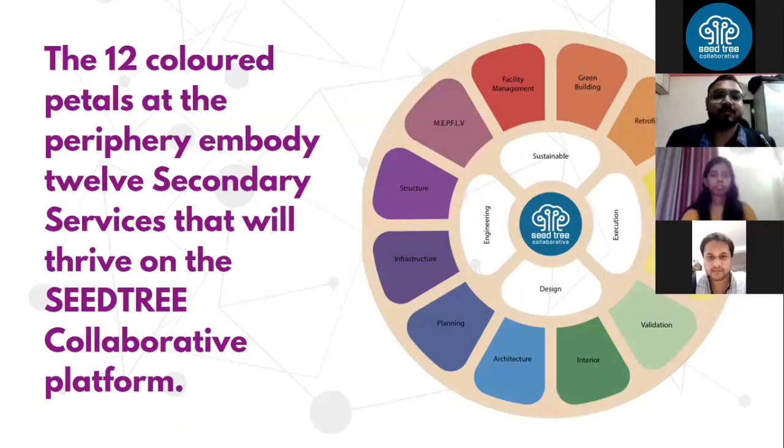So right now, till this particular stage, we have 2,863 professionals from 15 countries, 42 states, and 448 cities. So yes, thanks to each and every professional's contribution towards our company, we have come to this particular platform where we can say, yes, we are doing a good job. And we can hope that we can do much, much better in the future.

Now, to begin with this, I would like to say a little about our CEO and founder, Mr. Architect Karan Athodaria. History has seen many great leaders, and today we see them in Karan Athodaria.

Even during his career of 9 years in the field of architecture, he has identified various gaps in the AEC industry. The utter neglect towards the competence of industry professionals during the COVID-19 pandemic gave him the best idea that any man could have, and he revolutionized this particular AEC platform to a greater level.

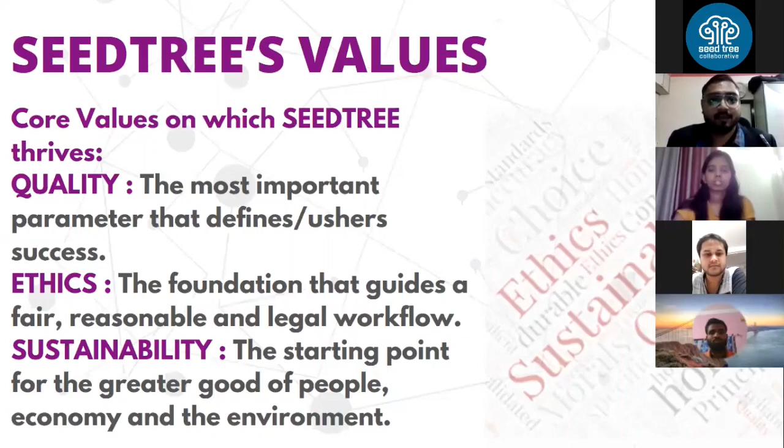Now, this can happen only with your contribution, our professionals' contribution coming to our platform. Our mission is simple: we bring every AEC professional to our particular platform. We give them a live stream of clients, and to our clients, we can provide the best slot of our AEC professionals. That is what we're looking at. That is what our mission is.

As I said earlier, imagine if in one city there are 100 AEC professionals, and now imagine if all the professionals are on one particular platform. You must be imagining there are 100 AEC professionals. We bring them all together.

How can we grow? For you, we have a new thing that we want to introduce, and that is our community platform. As you know, in recent times we have started our Facebook group, on which we have started to promote one particular idea which is beneficial for you, that we want you guys to collaborate with each other.

Our community platform encourages all AEC professionals to come together and interact with each other. Since we are on a digital platform, even if you are sitting in Mumbai and the other professional is in Surat, you can still come together digitally and work on that particular project. That is the main idea that we're looking for.

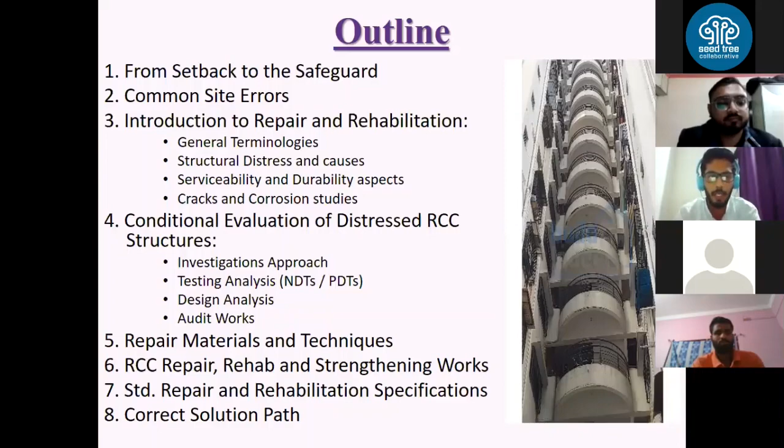The outline of topics we will be covering, you can see on your screens: from setback to the safeguard, followed by common site errors, introduction to repair and rehab. It will include general terminologies regarding repair and rehabilitation of RCC structures. Apart from that, conditional evaluation, which is the most important topic of the entire webinar, followed by materials we will be using for repair and rehab, then the specifications, what all procedures we need to follow for any structural repair work, and lastly the correct solution path. We'll see all of them one by one.

Okay, so we'll start with from the setback to the safeguard. As you have seen the topic, evaluation of RCC structural distresses, it has been highlighted in brackets from the setback to the safeguard. I have intentionally mentioned this to get the attention of all the professionals here. The setback to the safeguard is a very important thing to note.

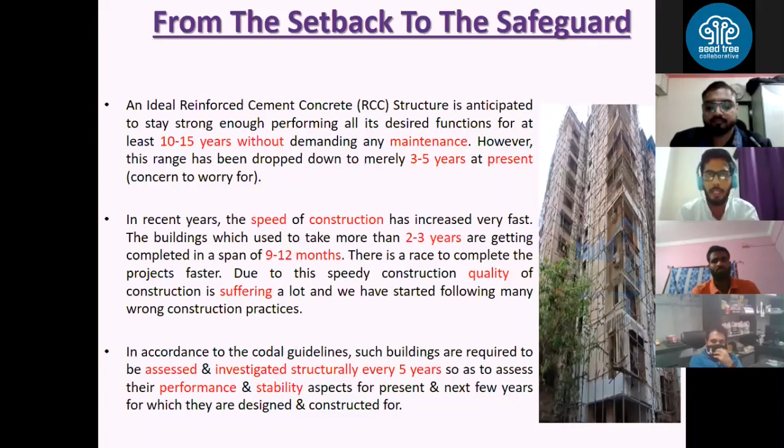Setback means, if we talk about a few years back, the RCC structures which were being constructed, the quality of construction and the quality of materials available in those days is not available in today's scenario. So this setback was all set perfectly fine. But if we talk about the safeguard, yes, the buildings are not that safe. So you can see accordingly.

Now the problem is these three phases are not good for your construction and casting provision. But what is the actual use of starters? If I ask you what is the actual purpose of constructing a starter before casting any column, it is proper positioning of the column. Now my question is, is proper positioning the only thing we are looking for? Or does the starter make sure that your column is constructed in a single pillar, in a single alignment? The answer will be no, right?

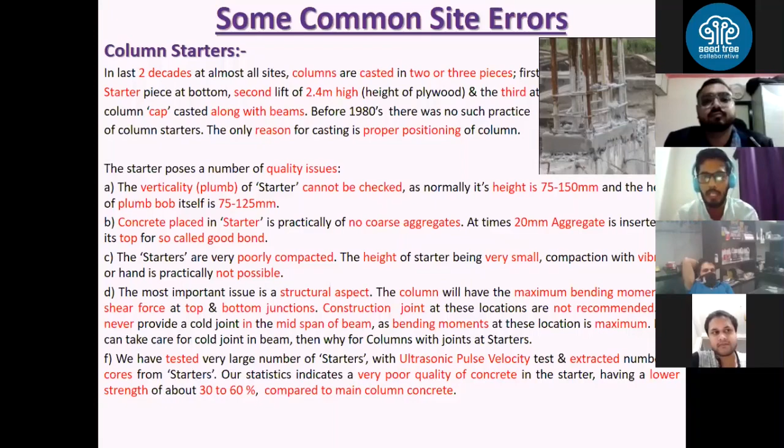Similarly, for the starters, when we are making the concrete material, what about the volume of coarse aggregates which we are using? And if we are using the coarse aggregates, are they of the desired sizes which should be used? Are they of 20 mm sizes, right? So all these things we need to look after.

Now, if I talk about column concreting, the casting of columns, again, as I said, is done in 3 phases: starter, plywood level, and then the top level. As per the IS codal provision, we are aware that we need to pour the concrete from less than 1.5 meters height. But in current practice, it is more than that, right? So this leads to the segregation problem and all those sorts of things.

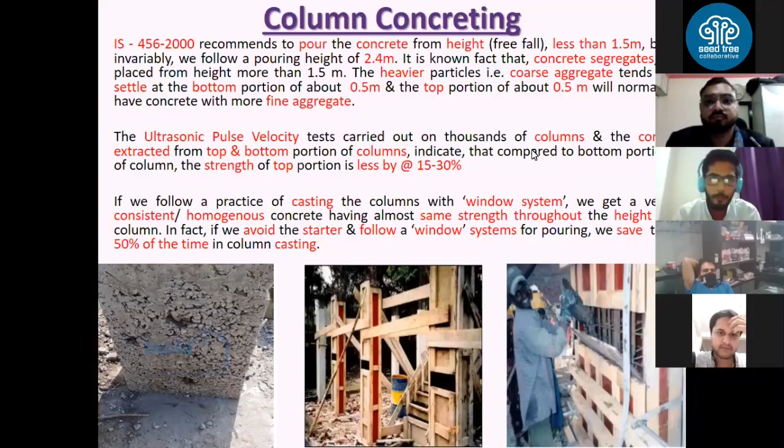Okay, now one more important problem is regarding the waterproofing and the plaster work. It is a very common practice that when the structural designer is designing a particular terrace or floor slab, the load he is assuming for the design purpose is around 200 to 250 kg per square meter as an assumed dead load. But what about the practicality of this? If you have a large span slab, then the load is much more as compared to the one which was taken earlier, right?

So there are many factors which are influencing this, like the distance between the drain spouts, and all those things are visible only on site. They are not considered in the design part. So these are also some of the problems. Along with that, plaster issues. Plaster is all about the thickness of plaster, whether it is the inner wall or the external wall. The same thing happens with plaster work also.

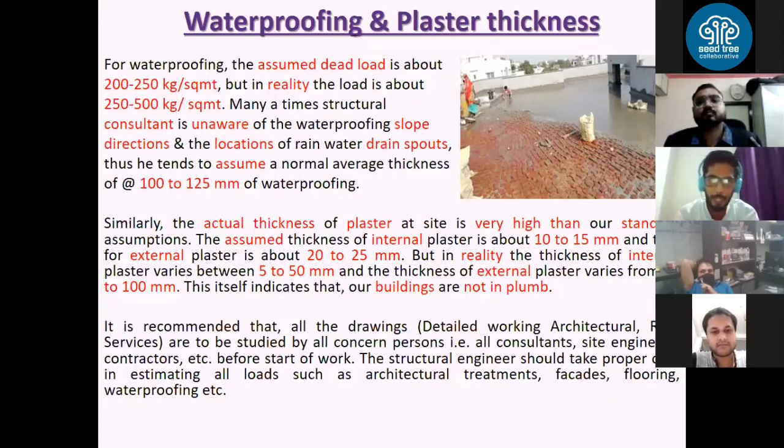The internal plaster thickness as well as the external plaster thickness, as considered by the structural engineer or civil engineer, is not practiced on site, right? So the overall conclusion is that the structural engineer as well as all the professionals involved in any construction work need to look after these small things, because they may lead to a big happening, right? Next, please.

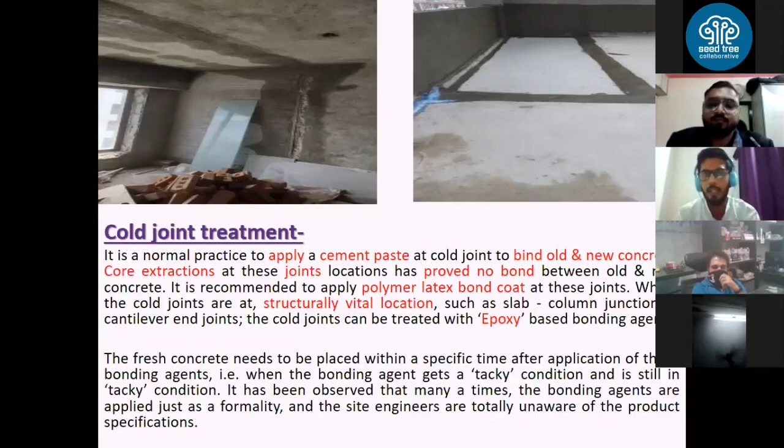Now, what we are practicing these days is just applying a cement paste or some other grout-like material, and assuming that the construction joint is now completely okay and uniform, but this is not the actual case. Those construction joints must be treated very carefully, because they might lead to a big happening. So we must use quality materials like polymer latex bonds or epoxy construction chemicals, so that the construction joints are treated very well.

Okay, now this is a very hot topic today, ready mix concrete. Across the constructions happening globally, residential, industrial, and commercial, if the quantity is more, if it is volumetric work, we are 100% going with RMC. But is RMC that reliable? We have so many questions regarding this. If you see the screen, it has been observed that RMC is used specifically for consistency, right? The quality of material which we should get.

But the problem is, in the checking of cube strengths, there are very large differences. If the testing is done in the RMC laboratory versus the testing of cubes on site, the results will be very different, right? So what is the actual problem? The RMC suppliers claim that the site cubes are not cured properly, the compaction was not proper, and there is site mismanagement, meaning they are made to stand for long due to mismanagement.

And for all these things, suppliers are not responsible. This is the claim from the suppliers' point of view. Now, if we talk about the owners, what owners are claiming is the RMC plants are using too much quantity of fly ash. They are using pre-wet aggregates. They are using very less amount of 20 size, which is the standard size of coarse aggregates. They are manipulating the water cement ratios and all.

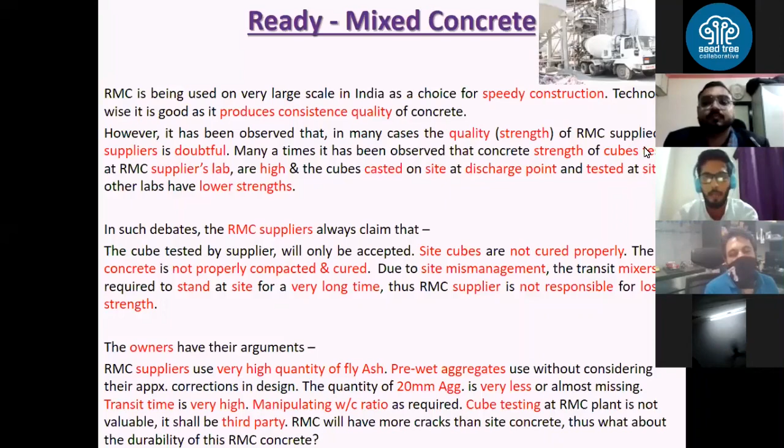The cube testing in RMC should not be done in the RMC plant laboratory. It should be done at some other site or some other lab. So these all are the claims from both the parties, right? Next, please. Now, we have got the claims from both the ends, but what is the solution for that? So the conclusion says the ultimate answer is the NDTs. NDTs, as we all might be aware, are laboratory testings as well as site testings. So I was talking about the glitches, the conflicts between the owner, the builder, as well as the RMC supplier. So that was all.

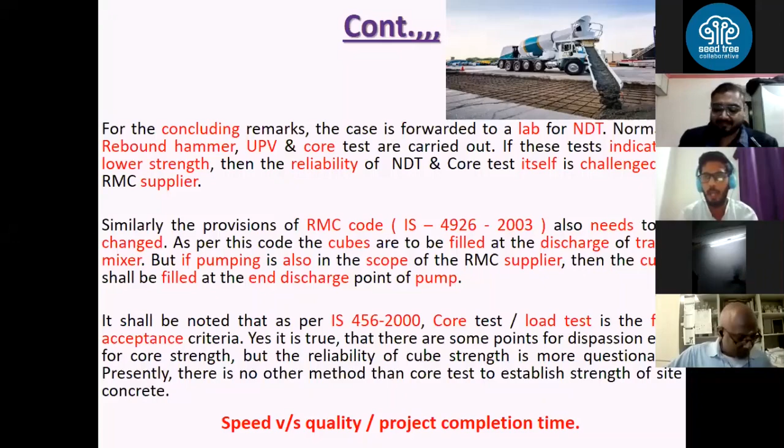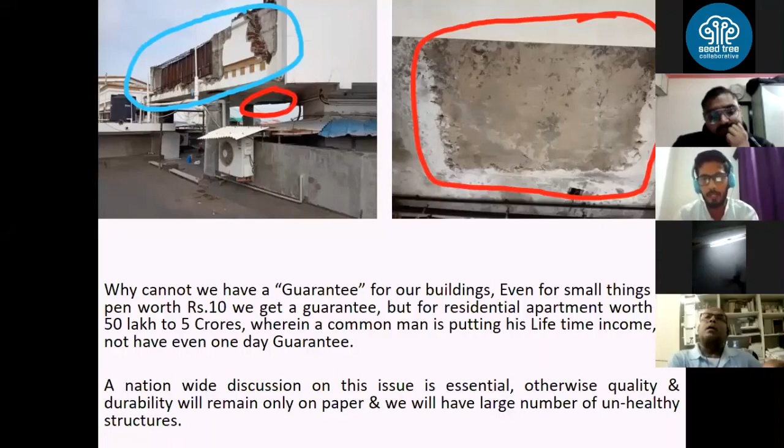Next, please. Okay, so these topics were something out of the box, not directly related to our today's topic, but indirectly related, I must say. So now we are entering into the subject. Before starting, we should know the basic terms of general repair and rehabilitation. Repair is nothing but restoring any broken surface or broken component of any building, by which the building gets into position once again.

Rehabilitation is making that particular building or component return to its previous good condition while ensuring safety and utility. Now talking about restoration, it is related to the strength. We are regaining the strength of that particular material or building component so that it can be used again. And retrofitting is directly related to the seismic strengthening of that particular component. So these all are the basic terms which I think you all are aware of, right?

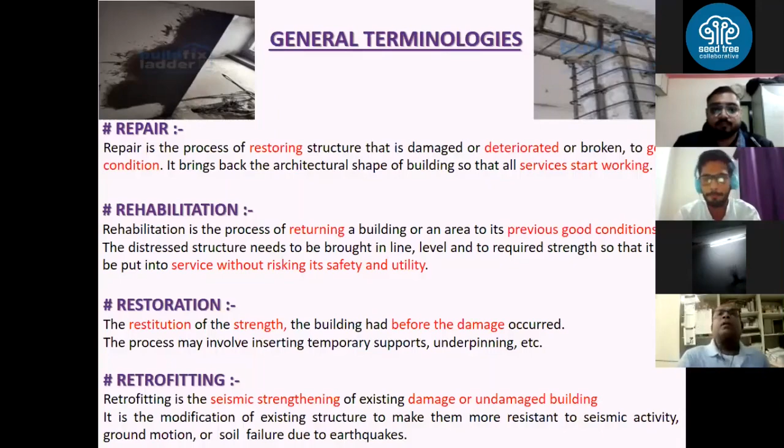Okay, structural distresses and the causes. I think many of us are already aware what sort of distresses are happening these days, because we might have seen many cases like that. We are seeing a lot of cracks, corrosion issues, weathering issues and all. But what are the causes behind those damages? So I have highlighted those causes: weathering effects, aging, structural overloads. There are many, so we'll be discussing them one by one later on, right?

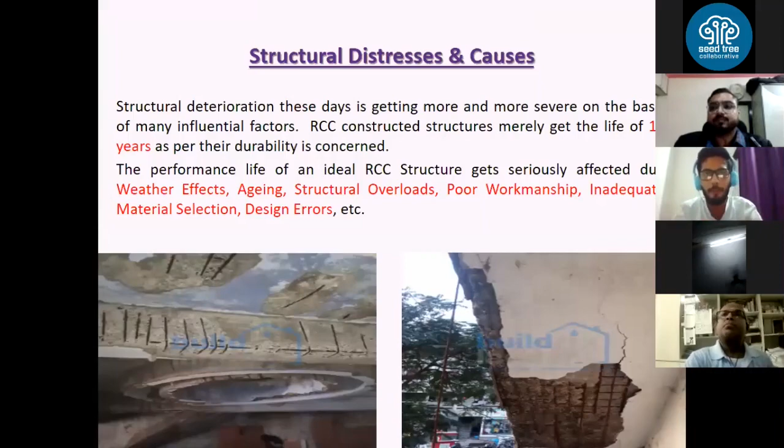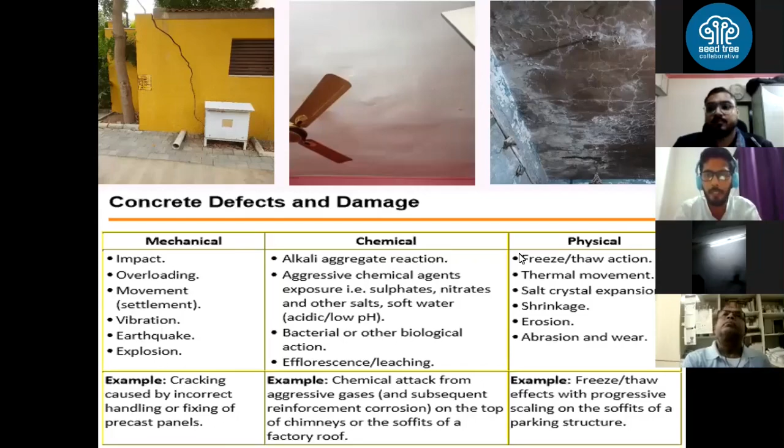Okay, now some serviceability and durability aspects. Let me tell you one thing. The entire building, be it residential, commercial, or industrial, is fundamentally dependent on two aspects: number one is serviceability, and number two is durability. If these two aspects are fulfilled to a very good extent, then I can say our building will last for a long time, right? It will have a longer life.

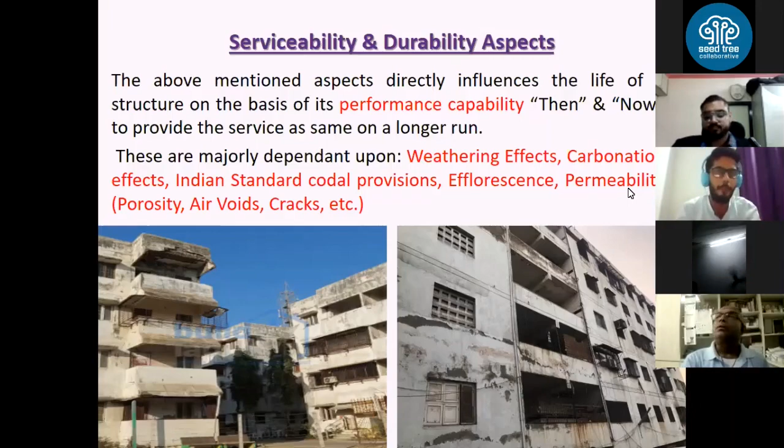So there are many effects which I have already mentioned: weathering effects, carbonation effects, efflorescence issues, permeability issues. These all are affecting serviceability and durability directly, right? Next, please. Okay, now I have included a few photographs. Despite the written contents, I have focused more on the pictorial views, because these are things we can relate to clearly, right?

So you can see the first photograph, honeycombing in the RCC structure. It is an RCC wall periphery wherein you can see the honeycombing. On the right hand side top, you can see the spalling of concrete. And in the bottom images, the first one is regarding insufficient concrete cover, due to which corrosion is taking place. And the last images are regarding the efflorescence issues.

Now, efflorescence is a very burning issue today. If we talk about the distresses of buildings, everyone is talking about the external stresses: settlement, cracks, leakage issues, structural issues, wall issues. Today there are many such cases of efflorescence. But yes, solutions for efflorescence are also available today. So you can see the treatment going on for the efflorescence as well.

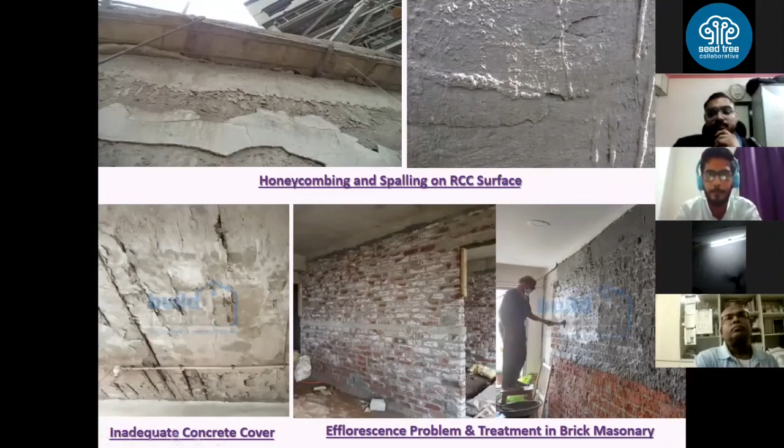Okay, now these two topics are what we can call the seeds of RCC damage, or structural damage. These two things play the most important role in damaging any building to any extent. It can start with a small hairline crack and extend up to a complete collapse, right? So the first and foremost thing is how we can differentiate between an RCC crack and a masonry crack. An RCC crack can be considered a structural crack and a masonry crack a non-structural crack. And we'll see the difference in the next slide.

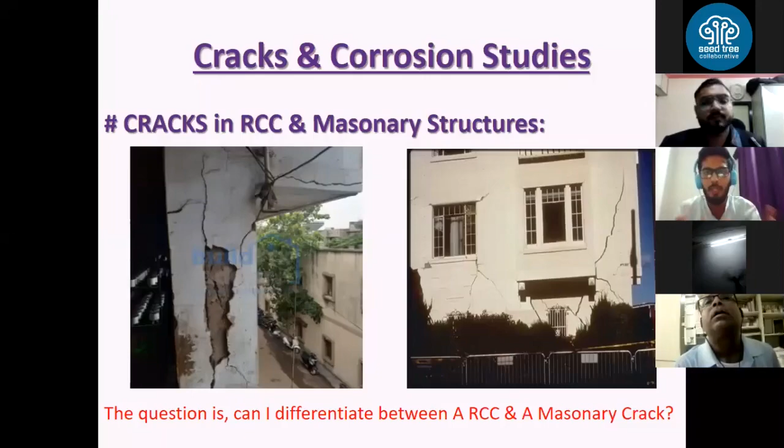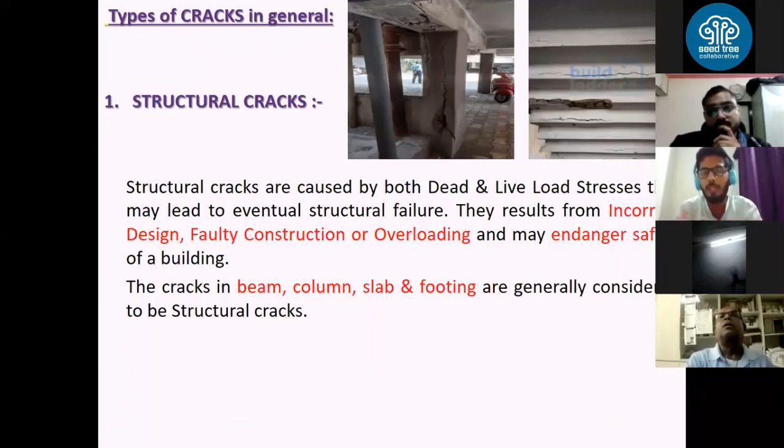First, structural cracks are initiated by the stress forces of both dead and live loads. A few of the common factors are incorrect design, faulty construction, or overloading. Most of these structural cracks can be seen in beams, columns, slabs, footings, shear walls, infill walls, etc.

Right? Okay. Now, what are the categories of structural cracks? You can see in the image itself there are four categories of structural cracks, from which you can see the basic difference: where they are starting, how they are propagating, and what path they follow for crack propagation.

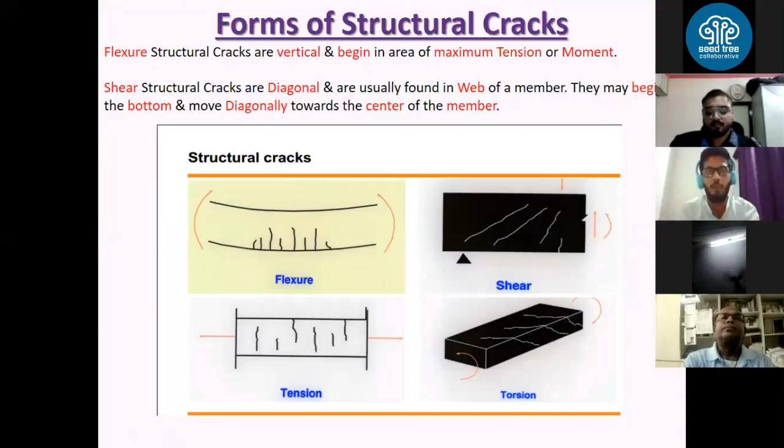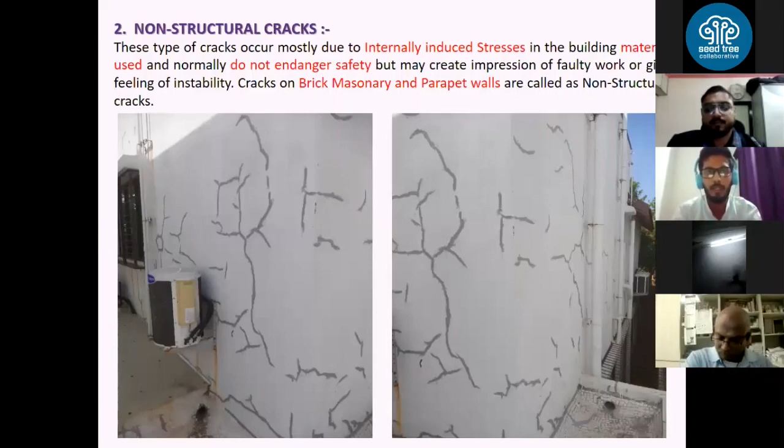Okay. Now, non-structural cracks, as I said, are not endangering the condition of the building or life. They are just impacting the non-structural parts of the building, like parapet walls or other brick masonry and block masonry walls. So these cracks you are seeing on the walls are considered non-structural cracks, and their treatment is also possible today.

Now we have seen the types of cracks, but the question is, what are the causes of cracks? The previous slide, please. We have seen the types of cracks, but what are the causes from which these cracks are generated? These are divided into two parts. Number one is the plastic stage, what we call the fresh stage of casting, and the other is the hardened stage, after the concrete has hardened, right? So these are the categories.

Before hardening, in the plastic stage, there are construction movements like formwork getting moved, and settlement happening. Cracks in the plastic stage include plastic shrinkage cracks, which we can also call wet shrinkage cracks, as well as crazing and scaling. All these major cracks are caused due to these reasons in the plastic stage.

And if we talk about the hardened stage, there are many other factors also: the chemical reactions, the design reactions, the construction errors, the weathering action, the environmental impacts. All these affect the RCC structure, the building, and then it gets propagated in the form of cracks.

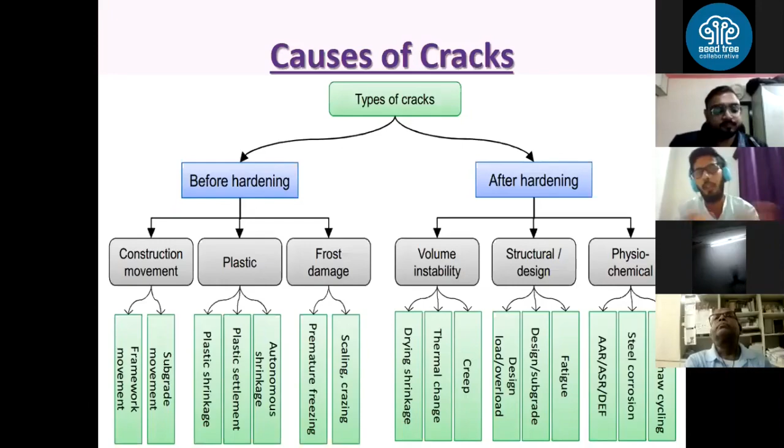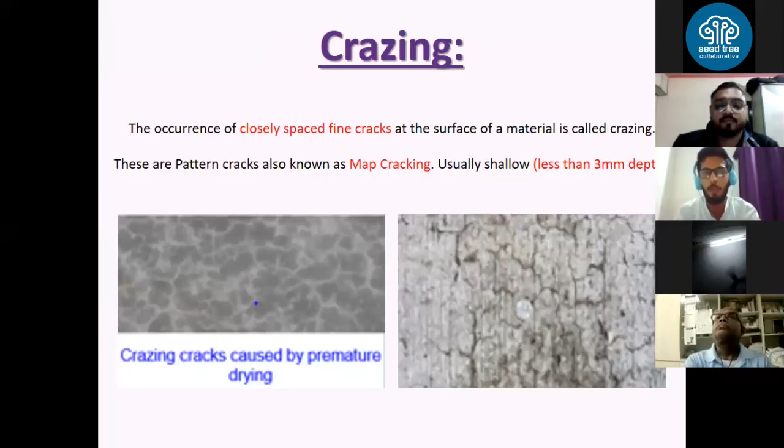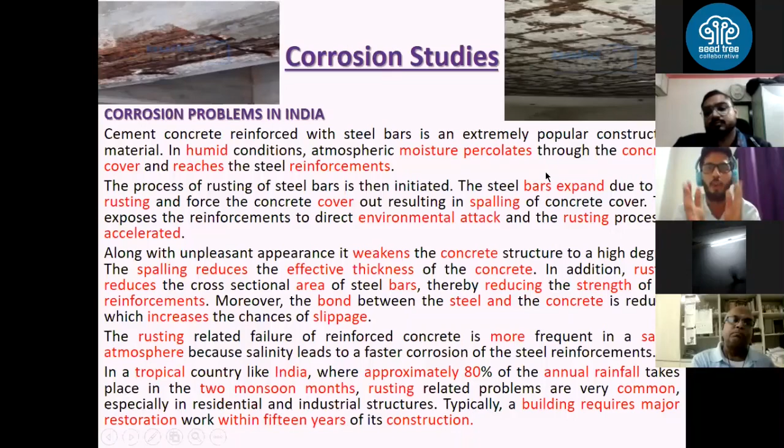And a few of the measures we can use to protect our reinforcement bars are: we can use good quality concrete, and we must maintain the water-cement ratio. If corrosion has already occurred, steel treatment should be done, like rust remover application, corrosion inhibitor application, superplasticizer application, and so on. So these are the solutions for corrosion.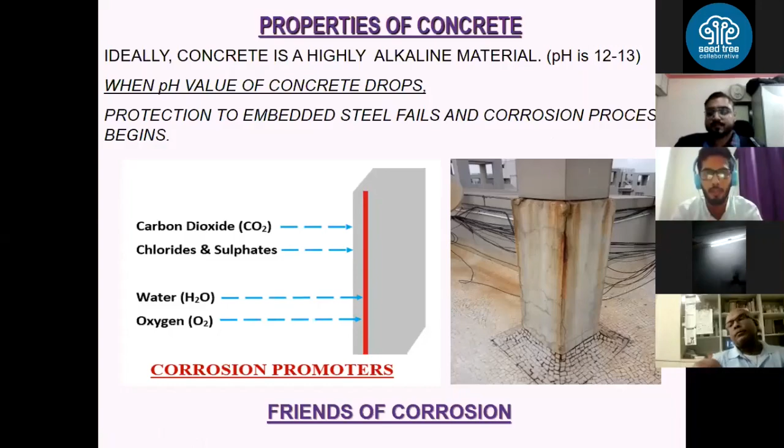What is the major reason? So there are a few points. If the concrete cover is okay but the steel is still getting corroded, there are factors like water ingress, moisture ingress, and carbonation impact. All these play an active role in corroding, in rusting your steel. Right? Next, please.

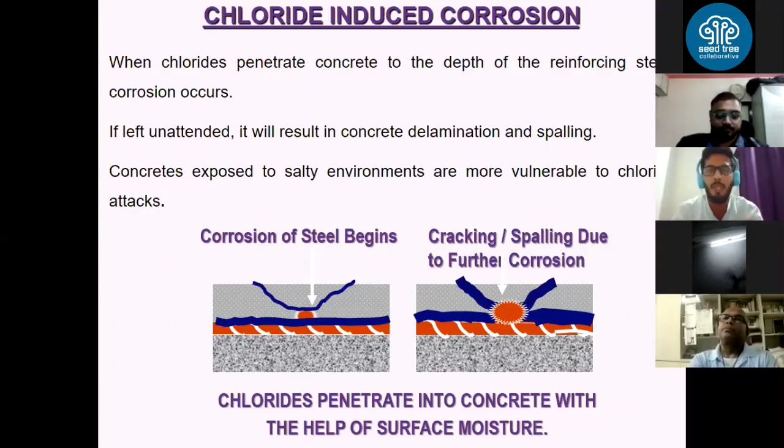Now the chloride impact of corrosion is mentioned here. The ingress of chloride is more when we talk about the weathering effect, the salty environment. If there is an exposed and salty environment, chloride impact is more severe. And the deterioration type due to chloride ingress is delamination and spalling of concrete. Okay, as I said, carbonation plays a very important role.

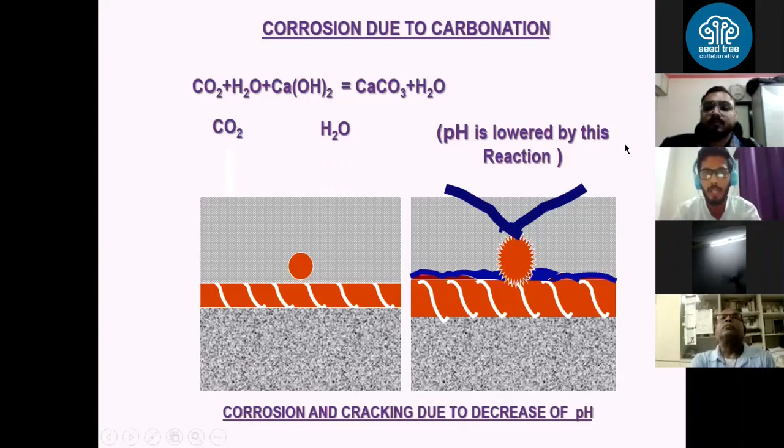So the gaseous impact is also equally important in rusting your steel, in corroding your steel. So the general chemical reaction which takes place for carbonation to occur you can see over here. This is directly reaching your steel and decreasing the pH value of the concrete, so that corrosion takes place. So we must avoid carbonation too.

Now let us talk about oxidation, how the amount of oxygen plays a role in corroding the steel. If you see the bars, I have shown different types. First is pure iron, then the impact of oxygen and moisture, followed by excess moisture ingress, then moisture ingress along with salty weather, and finally moisture ingress as well as salty weather leading directly to leakage issues. Right. So these are the impacts oxygen has in corroding your steel.

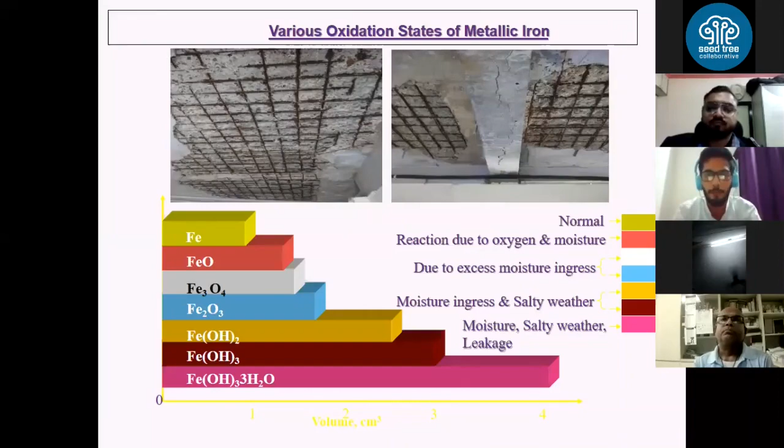Okay, so this was all about the RCC deterioration, distresses, the parameters which are related to them, and then the cracks and corrosion. Now moving to the core subject, how these distresses or these damages need to be evaluated. The major important thing is the actual and the correct evaluation of these damages, because any problem, I personally believe, any problem is cured once you are sure about the source of that particular problem, from where did it appear, what type of problem is it, and how you are dealing with it to sort it out.

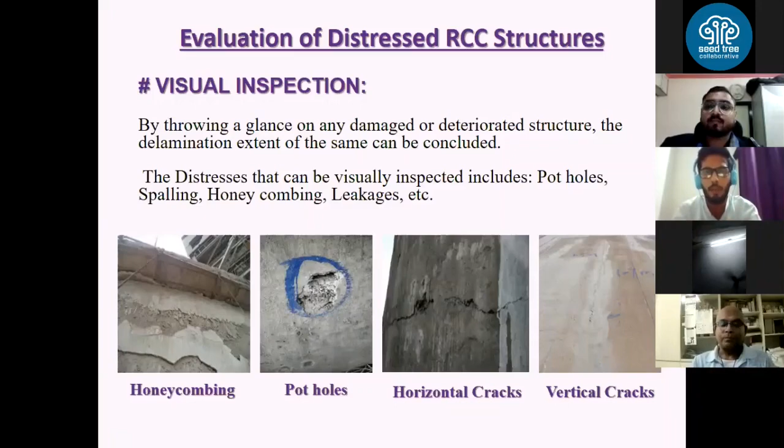So the evaluation starts with the investigation approaches, and the first and foremost thing is visual inspection. By visual inspection, you can see these types of problems: honeycombing, potholes, cracks, and all. These kinds of problems you can see and note down on your notepads. Moving forward, the second stage is the testing analysis. The things which cannot be caught by our naked eyes or by visual inspection are considered in this subject.

Testing analysis includes the NDTs and PDTs, what we call partial destructive tests and non-destructive tests. There are n number of tests available in the market for testing. There are many partial destructive tests, there are many non-destructive tests, but I have mentioned only a few which are playing a very important role in RCC investigations. I have mentioned only those parts.

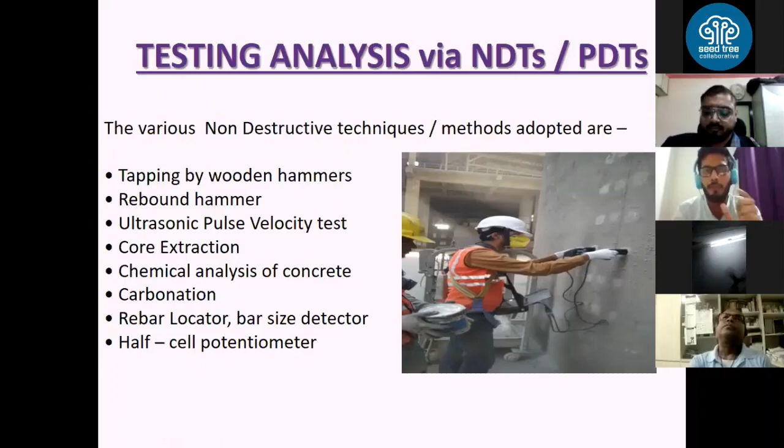Okay, so these tests: wooden hammers for mechanical checking, rebound hammer, ultrasonic pulse velocity, which is very important, core extraction, chemical analysis, carbonation, rebar locator, and half cell potentiometer. These are the tests which can be performed to get the correct evaluation of strength and quality of concrete. Okay, we'll start with rebound hammer. I'm not going deep into all these tests. I'm just mentioning a few things which we need to consider.

Rebound hammer is the initial level NDT which we are doing. It is just a single hammer which you can see in the image itself. It is used for the assessment of quality as well as uniformity of the concrete, and it can give you a likely value of compressive strength. Mark my words, it does not give you the exact compressive strength of your concrete. If you are looking for the quality and uniformity of the concrete, you can definitely go with this test.

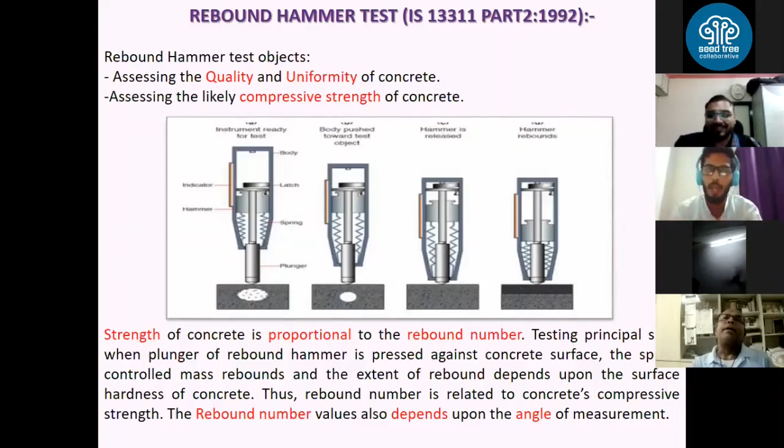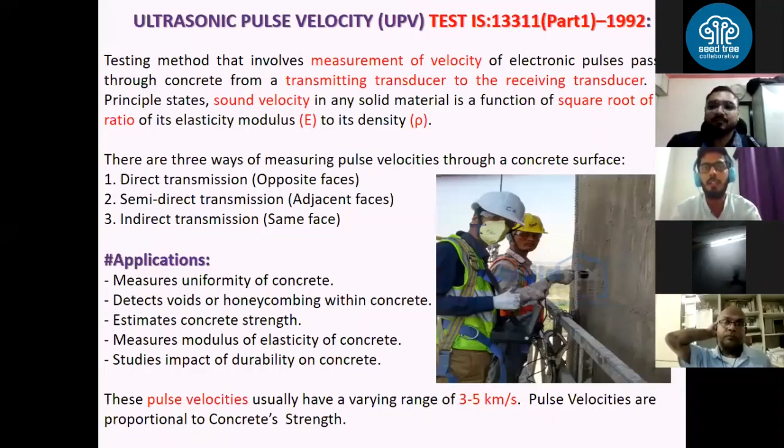But if you want your compressive strength to be checked on a clear, accurate or precise note, you have to go with the second test, which is the UPV test, as the name suggests, ultrasonic pulse velocity test. Now, let me tell you one thing. This is the most used test in the RCC investigation and evaluation part, because it is a non-destructive test. It is not damaging your concrete in any case.

You can see the test under process. It is myself testing the RCC silo periphery walls. This is the UPV test being conducted, and these are the values which play an important role in helping you check the quality of concrete. How is it? Is it doubtful? Is it excellent? Is it good? Likewise. Next, please.

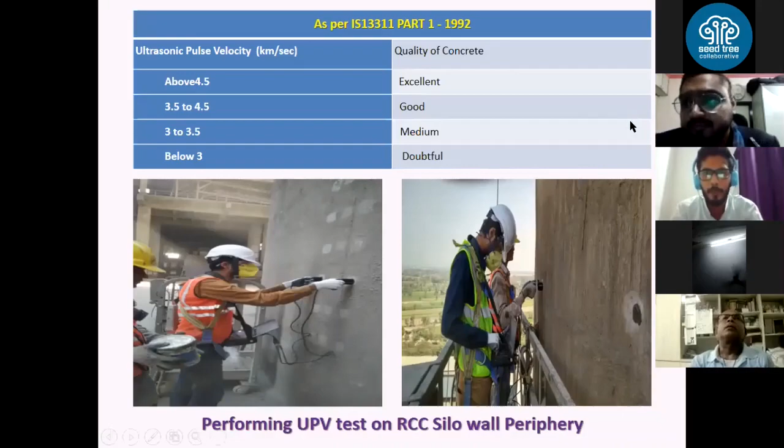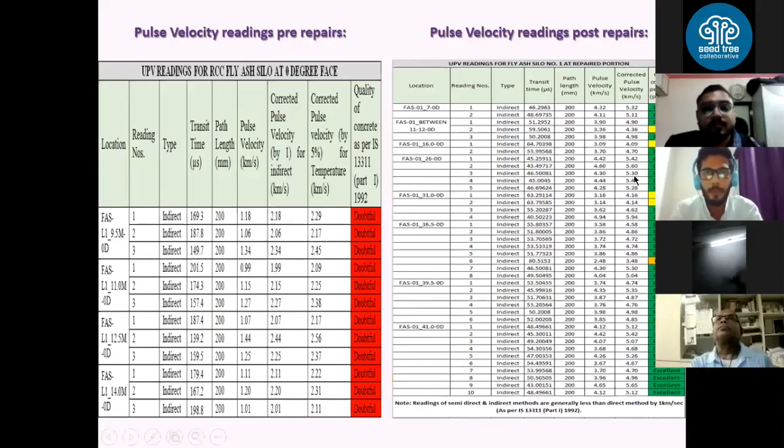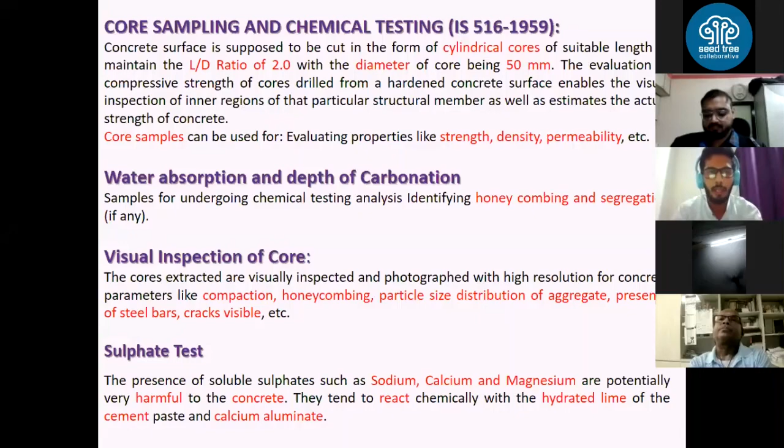Now, core sampling is the most reliable test in entire testing evaluation of RCC structural system of any particular RCC component. Core sampling is just a process of extracting a core. There are tests like chemical test and all these things happen in this core testing. The core which has been extracted needs to go through chemical tests like chloride content test, carbonation test, sulfate test, and pH value test. All these tests are done on the extracted core, and that is the reason why we get the exact, accurate, precise value of compressive strength of that particular RCC component.

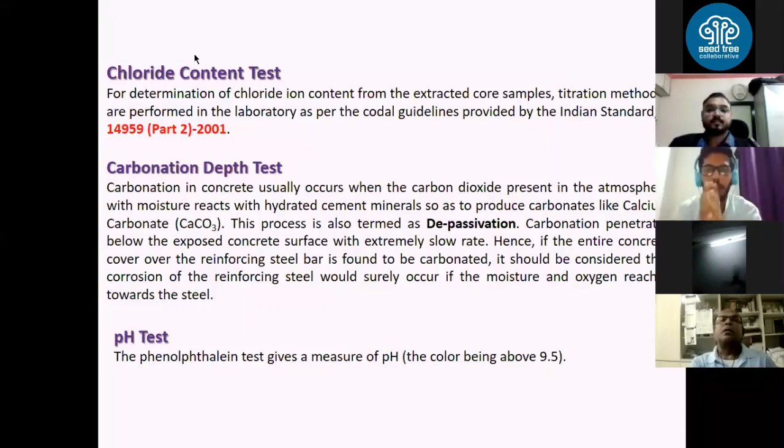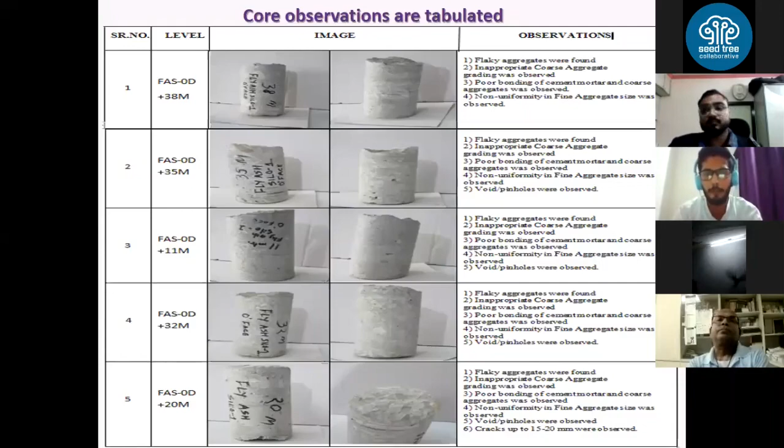After extracting those cores, the observations we get are shown here for your reference. The aggregates are flaky, the coarse aggregates are not much in quantity, and bonding of cement and aggregates is not much. These are the observations you can see in the core which has been extracted. So this was all about the testing.

Now moving forward, the design analysis part. This is where the important role of the structural engineer comes in. A structural consultant needs to make sure that after getting all the results of visual inspection and testing, we form an audit report. Along with that audit report, before introducing any construction material or repair methodology, we need to check the design analysis part also, going with load combinations, standard codes, and codal provisions.

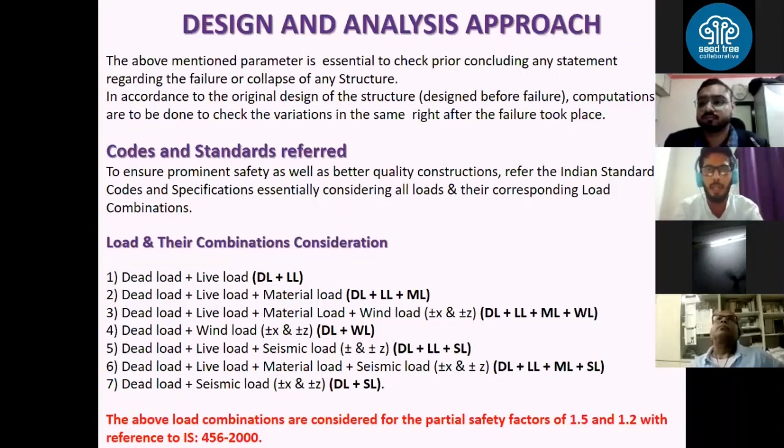But let me tell you, there is no exact IS codal provision specified which has to be used for repair works analysis or strengthening. There is an IS code though, IS 15988:2013, for seismic evaluation and strengthening of existing reinforced concrete buildings. This code can be used for strengthening of RCC structures for seismic analysis or evaluation. This code was made after noting the flaws or limitations in IS 1893, 4326, and 13920, which we were earlier using for ductile detailing and seismic parts. So we can use this code for your design approaches.

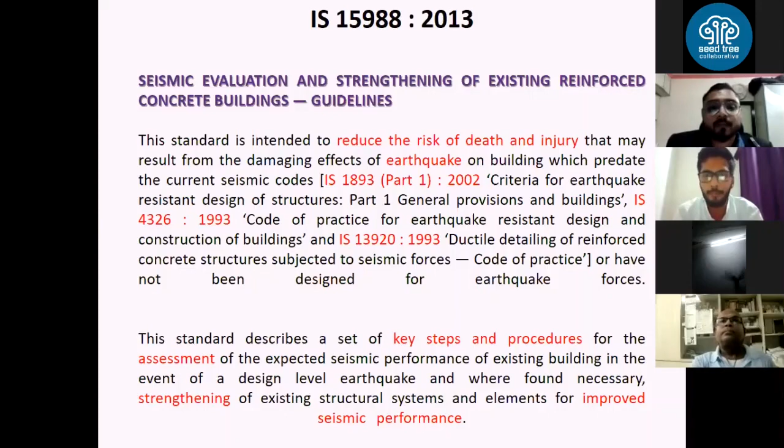Now moving ahead, after getting all the testing, auditing, and reporting done, we need to introduce few materials. The selection of material plays an equally important role. The methods, techniques, and materials which you use for repair or strengthening work, you need to pay utmost focus on selecting those materials as well.

So basic tools include chipping, breaking, removing, coating, shuttering, safety materials and all. And talking about chemicals, those used are rust removers, rust passivators, bonding agents, protective coatings, grouts and anchors, mortars and microconcrete. These are few of the running materials used in the industry for repair and rehab. I'm not focusing on any brands, but these are the base chemicals that can and should be used for your repairs.

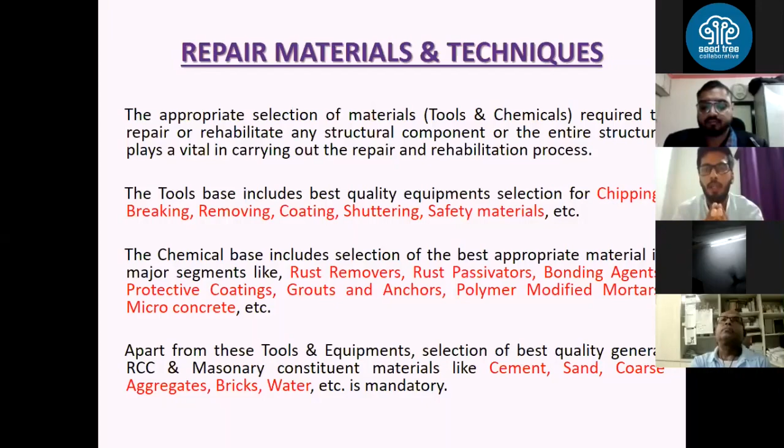Talking about basic materials, they are cement, sand, coarse aggregate, bricks, and water. I'm mentioning this specifically because today, cement, sand, aggregates, and bricks need to be selected very carefully, as these are basic materials we don't take enough care of. Water should be pure potable or soft water. Aggregates should be of perfect size, around 20 mm, the standard size of coarse aggregate. Cement should be of good quality, like I always prefer OPC over PPC. I always say everyone, please use OPC as much as possible, because the fly ash content in PPC degrades material quality. So selection of these basic materials plays an important role as well.

So after selecting the materials, now comes the part of RCC structural repairs and rehabilitation. What is repair and rehab? We already know what repair and rehabilitation are, but how is it done? There should be a standard format, which we follow, and which all agencies should be following, with a specified methodology used for implementing or executing any repair or strengthening work.

Few of the basic repair works mentioned here are crack filling works. For crack filling works, I prefer cementitious grout very little. Mark my words, for crack filling works, polyurethane based or UV flexible material should be given more emphasis, since they are UV stable and water resistant, making these materials more reliable. Although the cost is higher, we need to focus on this. So grouting materials, steel treatment works, polymer treatment works, and efflorescence treatment works are all considered in repair and rehabilitation.

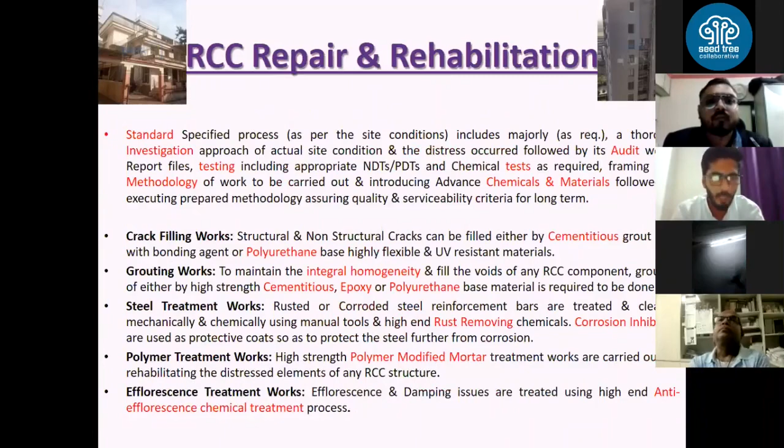Okay, now moving forward, jacketing. This is the strengthening part. Earlier it was repair and rehab, now it is strengthening. It is somewhat similar to repair and rehab, but there is a provision of jacketing concept over here, where extra steel is used.

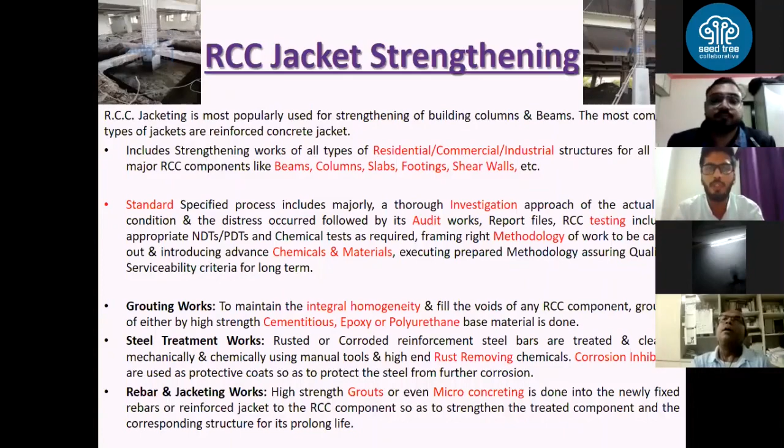The major things considered in the jacketing strengthening part are grouting works for integral homogeneity - that is cementitious, epoxy and polyurethane grouts you can use. Steel treatment works, where the rusting of steel should be removed by rust removing chemicals, and corrosion inhibitor material should be used for protective coating of steel. And lastly, the jacketing rebar work - you can use grouts and micro concretes as well for these materials.

Now, what are the minimum specifications that need to be followed for jacketing work? We'll focus on the next slide.

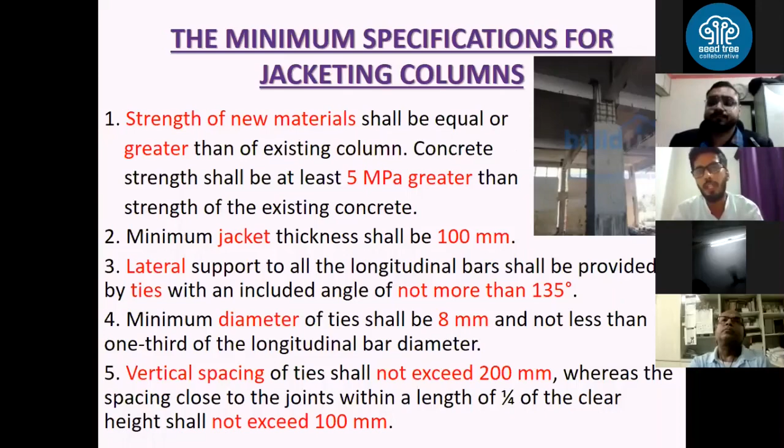This is the minimum specification, already mentioned in the IS code as I mentioned a few minutes back. I've focused on a few parts - the material we use should be of higher strength than it was earlier. There's a provision for minimum jacket thickness you have to maintain. The lateral supports, the ties you are using, should be of specific angles. The diameter of ties needs to be fixed. The vertical spacing of the ties - all these things need to be taken care of using the IS codal provisions, before going through with any jacketing work.

What are the pros and cons of jacketing work? Advantages - it increases the shear and flexural capacity of beams. For columns, it increases the compressive and moment carrying capacity. Also, the materials we use for jacketing, like cement, micro concrete, polymer material, are readily available in the market, so there's no hassle. And the buckling effect of slender columns is also solved by this.

But there are many disadvantages as well. The section sizes - if there's any site area constraint, you cannot use this practice there. We're adding huge dead mass, longitudinal bars, and there are many damages and punctures we need to make in the existing RCC beams, columns and slabs. The implementation speed is also slow for this practice. But as an alternative, there are many new materials available in the market, like FRPs, carbon fibers, glass fibers, aramid fibers. You can use those as well, but they are comparatively costlier.

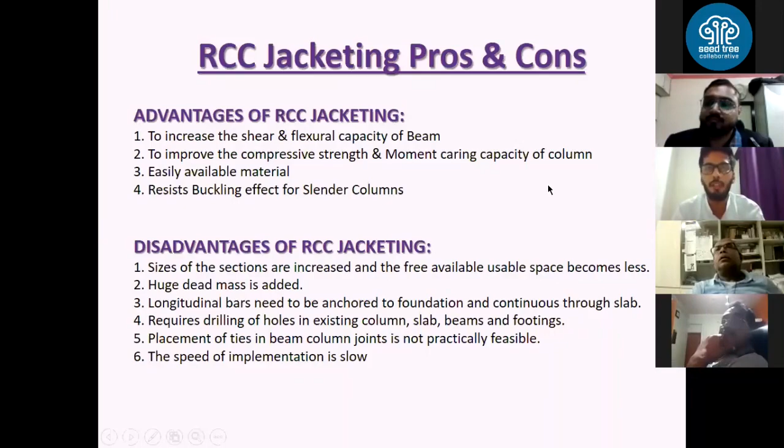Now, what is the procedure to repair or strengthen any building? I've just marked the key points of this procedure, but there is no specific procedure as such mentioned in any IS codal provision to be followed for repair or strengthening work. But yes, you need to make one.

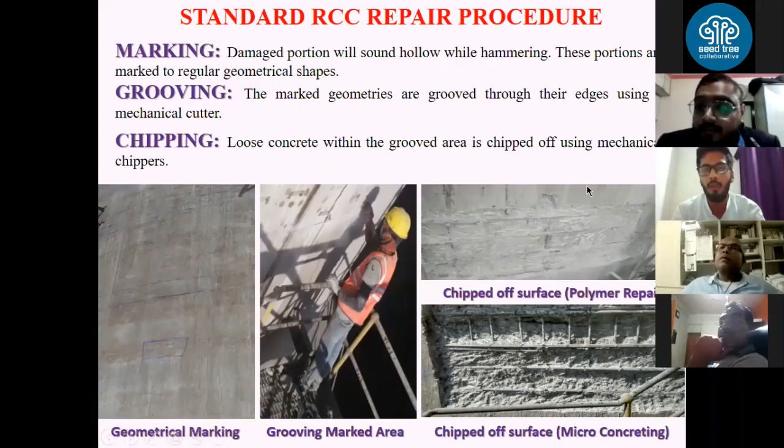So we'll start with marking. The marking should be done for a perfect geometry, and then that geometry needs to be grooved and chipped off using mechanical chippers. Then the loose concrete, which we investigate by light hammering, is chipped off, as you can see in the last image. These are all the things you need to take care of - this is the sequence we are following. Next, please.

Right after chipping, the next point is the integral homogeneity of the RCC - meaning the internal voids that have been disturbed or disintegrated. We cannot see this by naked eye, but as per the NDT results, we need to focus on that also. For these things, you can drill holes and then go for grouting works, be it cementitious, epoxy or PU based, whatever material you're using, depending on the type of distress. So you can use these grouting materials and processes to fulfill the integral homogeneity of your RCC surface.

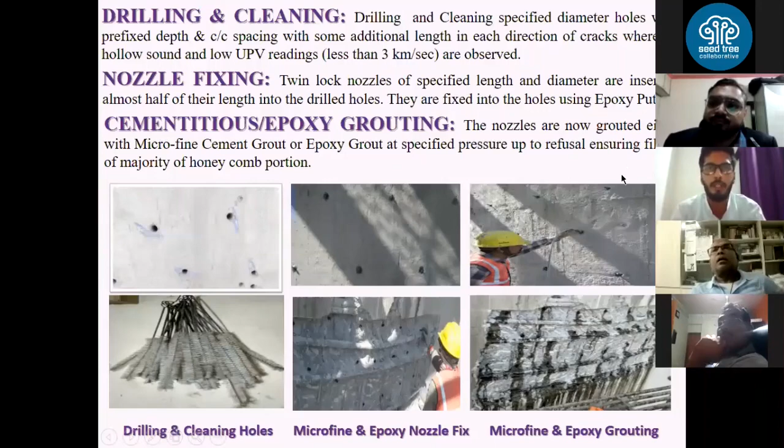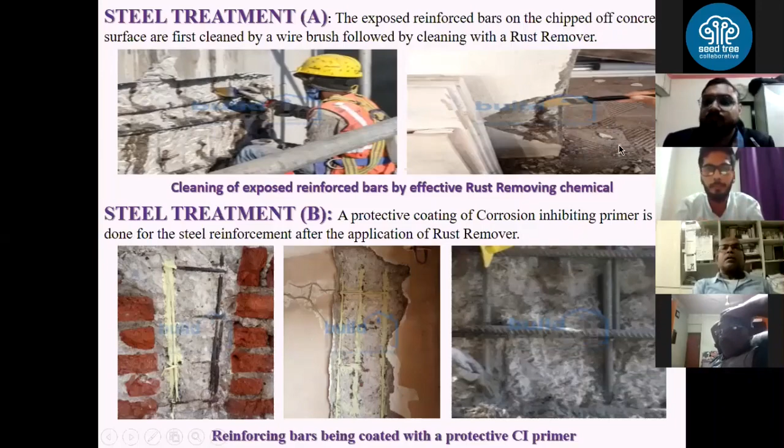Moving forward, after the treatment of steel comes the part of the filling material. This is something we need to take care of, because many civil contractors are practicing a very wrong approach here.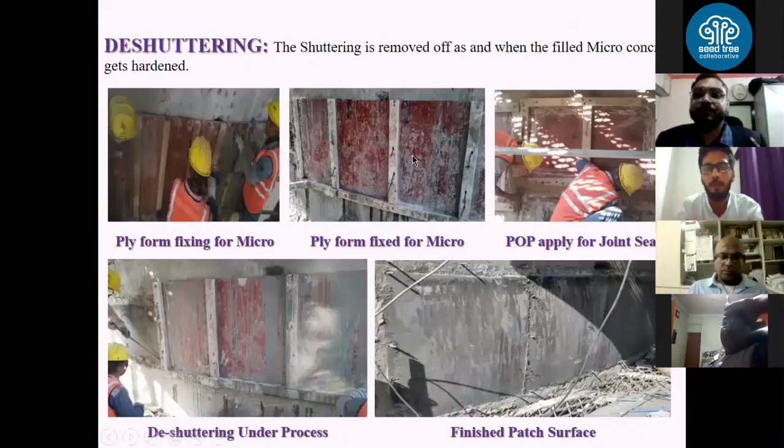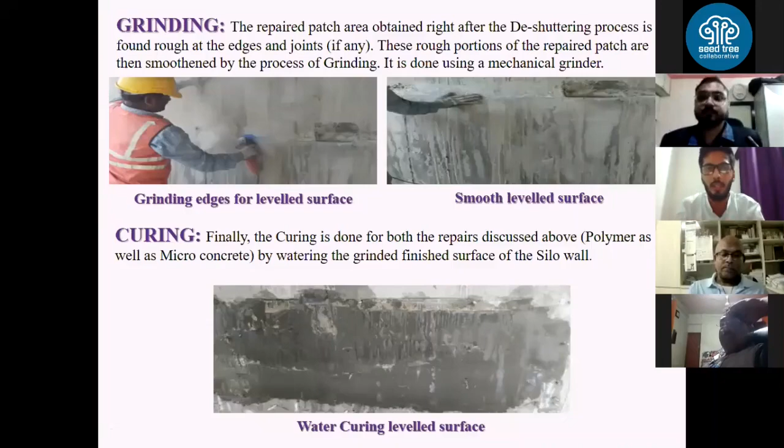Finally, after the grinding, comes the curing part. Curing is also a very important key. You have to do the curing at specified intervals or specifications. So curing needs to be done properly. That's all, next please.